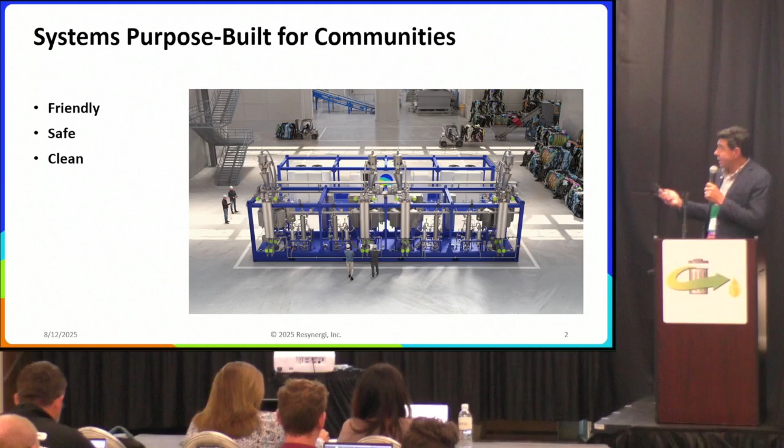This is the size of a semi-truck, the bed of a semi-truck. So we aim to provide great industrial jobs, to do it with a very small footprint and convince neighbors that we are a very small greenhouse gas footprint. There's no hazardous waste. We have source separated plastic, which means we don't have to wash our plastic. So we keep the site really clean from a water standpoint, runoff standpoint.

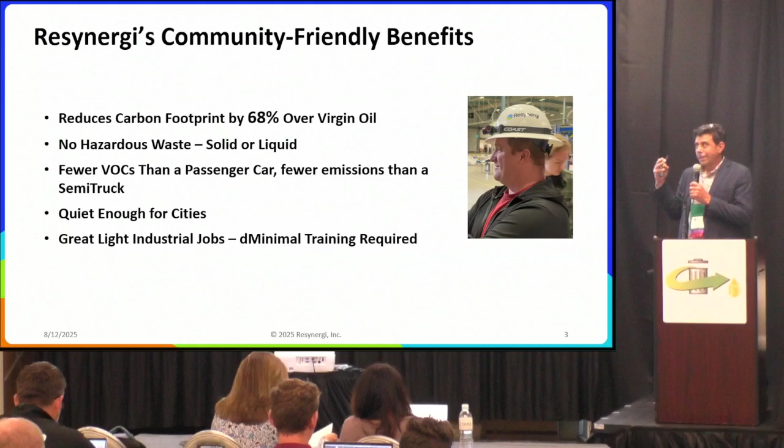We try to simplify this big time for the neighbors. The VOCs are equal to a car driving down the road on one of these 5-ton per day units, and the greenhouse gases are equal to a semi-truck. So they seem to relate to that, but we just need to keep driving home and convince them that's true with real data. So anyway, we're very, very community focused, and we're really good at getting all the politicians and so forth close to what we're doing and supporting it.

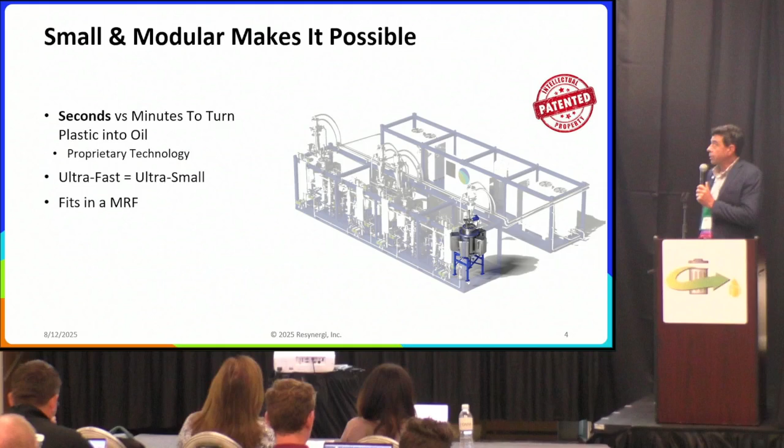So what makes this all possible is small modular. What we use as technology is microwave. So it's ultra fast, about 100 times faster than a typical pyrolysis. So because we're 100 times faster, we have just 1 kilogram roughly of plastic in our reactor at any one time. So that just goes really fast through the system, and our actual reactor is about this diameter and 3 feet tall. So we can go into very small places and be 5 tons per day in a very small footprint.

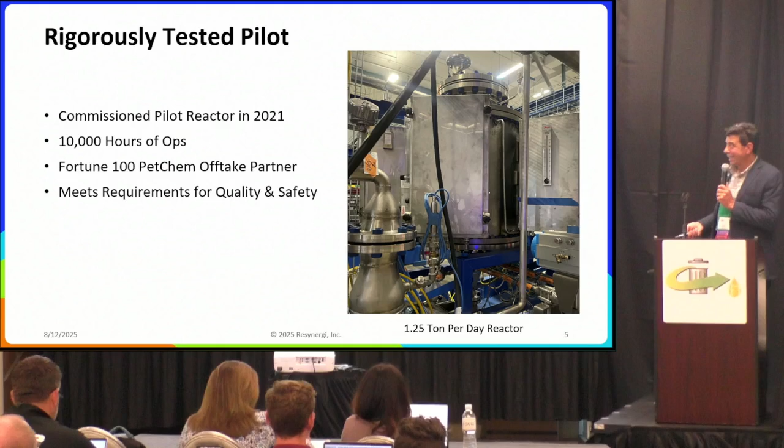I guess it was a year ago today, we talked about shipping our first tanker of oil with a single reactor. Now we have the four reactor, 5 ton per day system up and just about to turn on. We're waiting for our permit any day. So it's 30 to 45 days and we'll have that permit. It's all drafted and so forth. But we had to jump through hoops. We had to get UL listing on the whole thing. We had to do all kinds of things for AQMD, the air quality district.

So this is that first unit, 4 reactors on a skid, does 5 tons per day total. We'll be able to keep the system up running and rotate the maintenance. So we'll have 1 reactor down on occasion, just rotating through to keep the whole system going.

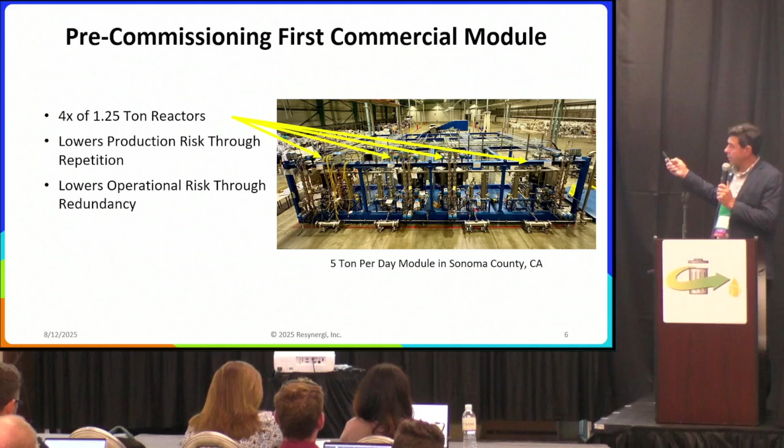So what we've done is we've turned the whole model around. The oil and gas industry is so used to having everything centralized like a refinery, collecting all the feedstock or drilling, bringing the crude there, and then refining in one central location. That doesn't work for plastic because plastic is so expensive to actually transport. So what we do, flip it around. What is the most cost-effective way to make a product? It's mass production. But what oil and gas does is make every single refinery on a customized basis. Every single one is customized because they're centralized at a different location.

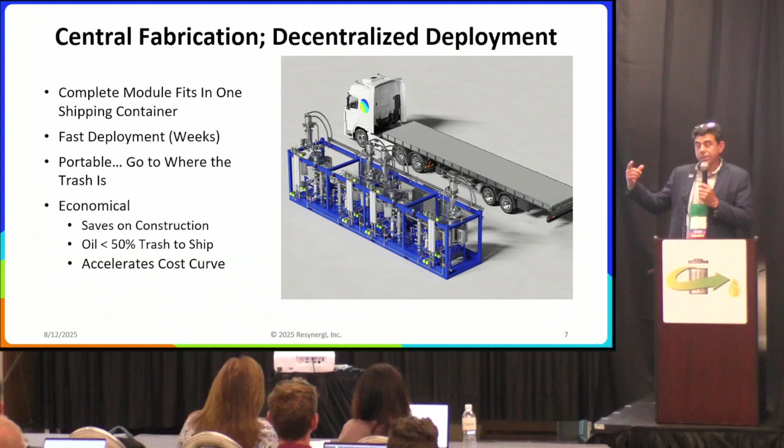We put the entire plant on a skid, and that skid is mass produced. So that's the lowest possible cost for the plant. And then decentralized deployment, because we bring the process to where the plastic is, there's no shipping cost for the plastic. So it seems obvious to do, but it's not if you're from oil and gas. So what this also means is ultra fast deployment, because these can be inventoried and delivered as soon as the site is prepped and ready. And then you can turn it up really quickly.

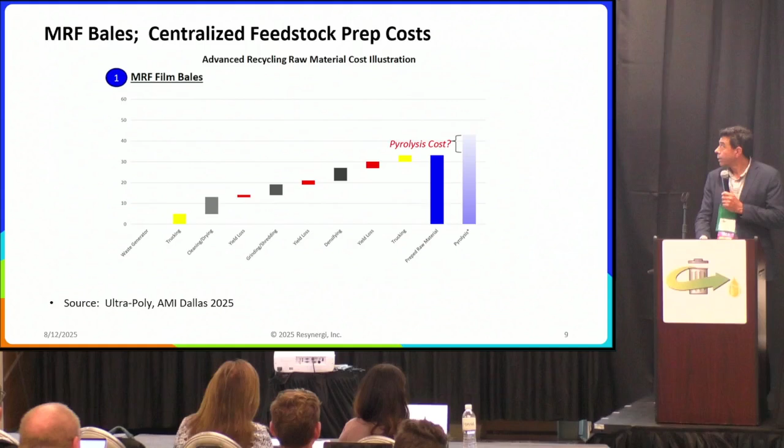But if you have everything in your pyrolysis plant right there at the MRF, you get rid of those two yellow trucking points, and if you have a really good relationship with the MRF, they'll actually pay you to take the plastic. So imagine the yellow going away, and that 0 for waste generation is actually a negative number. You can save over a third if you co-locate where the plastic was collected. And that's just what this slide shows. Those two yellow spots would go away, and you'd go from 33 cents down to 23, and then even less because they're paying you a little bit.

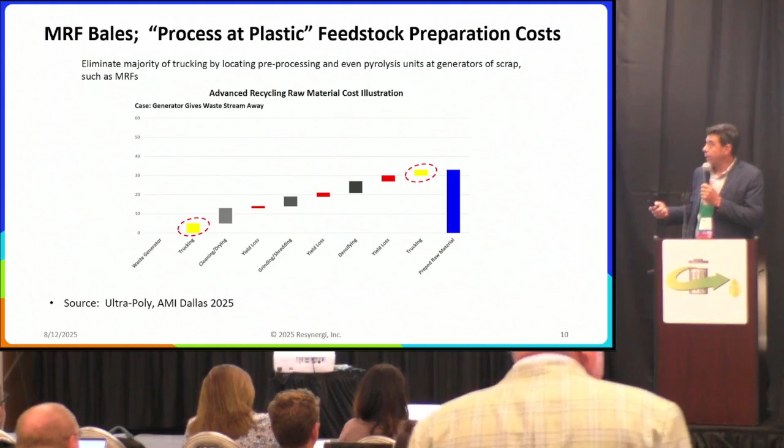We're getting paid because it costs almost $200 to landfill if you include transportation. By Recology and others up in Northern California, it's somewhere between a third and a half they pay us to take the plastic. So that won't be forever, but it's nice, and it will be for some time until there's a lot of pyrolysis plants.

So even better is not film bales, but mixed rigids that are hard. They just have one step, which was the grinding, shredding. There's no cleaning, there's no densifying into pellets. So if you take the yellow out, you're taking out 40%. And if you're that waste generation, there's more value in that, but usually those mixed rigids are almost throwaway as well, and they'll almost give that to you free, and you don't have to pay for that.

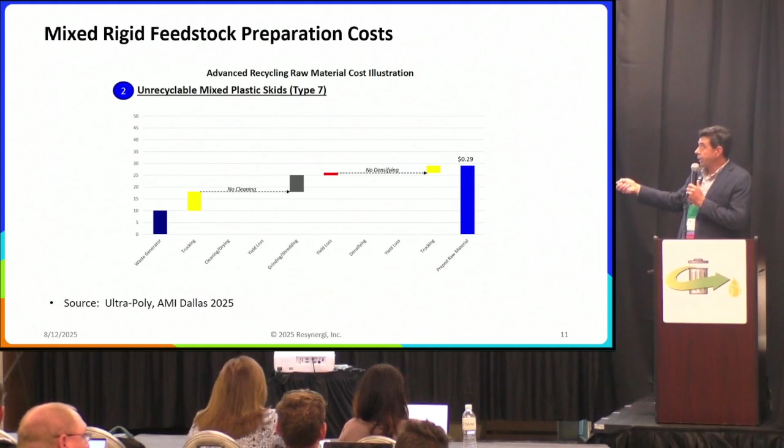But in any case, the summary here is that by decentralizing and locating at a MRF, you can save over a third of the prep costs. And if you're good with your negotiations, and because we're early in the industry and everybody wants to be first, there's enough people who want to be first on this, you're able to actually get paid for that generated plastic.

So with that backdrop, I did want to say something about plastic for mechanical recycling, which is the history of plastic prep. It has been all about how clean can we get that plastic. So we get plastic that's all over the map, but 1s and 2s are largely recycled, and there's a bunch of steps to get that really clean and sold as pellets. Mechanically recycled, not broken down.

It's very different in the chemical recycling world in the sense that you don't need it to be clean. In fact, you want the cost as low as possible, so you want it to be as dirty as your system will take. And because these systems usually break things down and take the dirty stuff and make it into char, you don't need to clean, you don't want to pay those extra costs. So there's a lot of effort to optimize for that.

The second optimization is for low footprint, because if you're decentralized, you don't need a big plant. You want something that works really well for 20 tons per day. You don't need a 100,000 square foot plant. You want a very small footprint and a small cost. So it's really counter to the traditional mechanical recycling prep of feedstock.